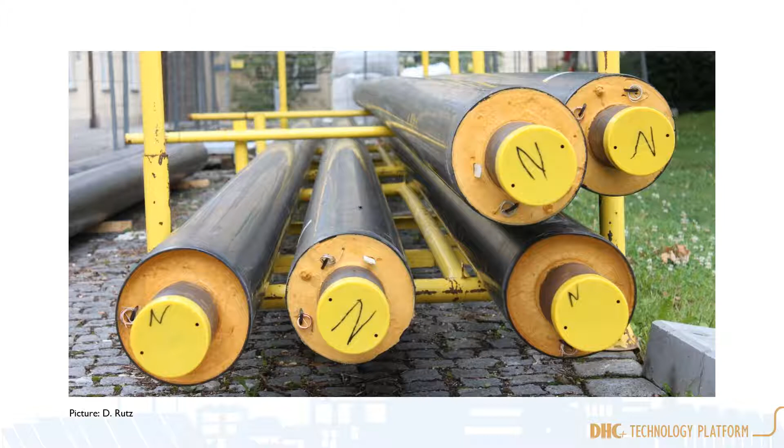Today, I'm happy to talk about this topic with our speakers. The first one is Matteo Pozzi. Matteo is participating in the UpgradeDH project. He is CEO and partner of Optit since 2010. After a degree in physics and more than 15 years in management consulting, Matteo is a big fan of digitalization and advanced analytics application to business processes. He's trying to build a better and more sustainable world.

The second speaker will be Evaldas from the Lithuanian District Heating Association. Evaldas is also actively participating in the UpgradeDH project, and he is an energy technology and economics analyst at the Lithuanian District Heating Association. Then we will hear from Sebastian Grimm. Sebastian has a master's in mechanical engineering. He is working for AGFW, the German District Heating and Energy Efficiency Association, more specifically for its research and development department since 2016. His research topics include digitalization, district heating pipes and systems.

I also have the pleasure of knowing Sebastian since 2016, when he participated in the 4th DHC Plus summer school in Warsaw. And finally, we will hear from an external expert, Peter from LOGSTOR. Peter is a product and academy manager at LOGSTOR. He's educated as an engineer at Aalborg University in Denmark. What's interesting is that he started working for LOGSTOR in 1992, which means he is a very loyal employee of LOGSTOR.

Aksana asked me to introduce the UpgradeDH project for everyone's benefit. It's a project that concentrates on upgrading the performance of district heating networks in Europe, spanning systems in Eastern European, Central European, and Mediterranean and Balkanic countries, and across the whole value chain: production, distribution, and consumption. It puts together interesting but also actionable best practices, tools, and options for upgrading existing district heating systems. There's also a well-done handbook, and right now a district heating image-raising campaign has been launched, which I'm sure Aksana will tell us about at the end.

The project is now at the beginning of its third year. We've got a good range of interesting options that have already been tested, and we are happy to see that the pretty ambitious objectives for improving primary energy demand and greenhouse gas reduction are likely to be met. We are now defining potential regional and national action plans, looking at replicability. This public webinar is one of many opportunities to bring you the know-how developed by this interesting consortium. The slide also has the website, which is a good source of interesting material.

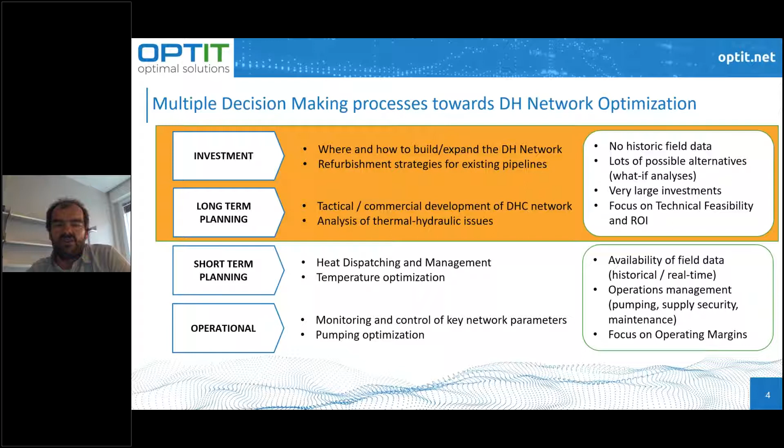Then there's also a big area of decision making in short-term planning, like how to dispatch heat, how to optimize temperature, down to operational decisions involving monitoring and control of network parameters and pumping optimizations. Today we are focusing on the upper part of the chain, even though during the UpgradeDH project we also had good examples of actions on optimizing short-term and operational planning.

The fact that pipes have to respect the thermal-hydraulic settings, the physics of it, but that also needs to be mixed with economics valuation. And the final result is something that needs to justify investments, which normally goes into return on invested capital indicators like net present value.

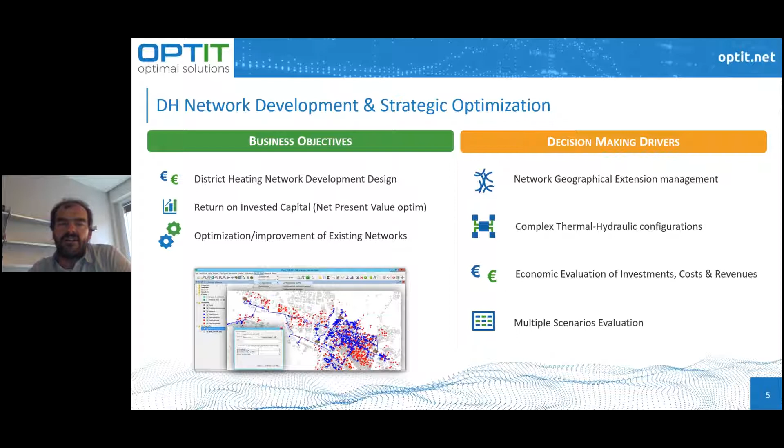So in order to do this, a tool has been developed that started on a GIS tool, allowing to manage all existing and potential pipings and users, of course a mix of different plants, both existing and potential.

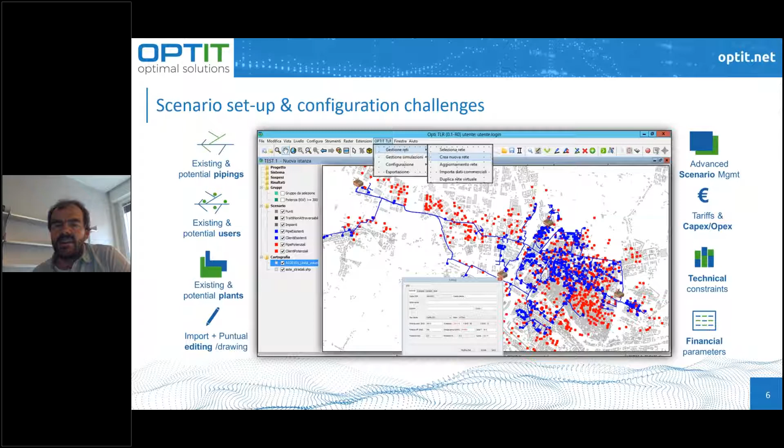Every element in the map needs to be editable and manageable by the user, and this needs to be characterized both from a technical viewpoint, but also from an economic standpoint with financial parameters in order to manage a diversity of scenarios.

So these are examples of studies on the thermal hydraulic simulations. This is actually coming out from UpgradeDH, because investment decisions require the capacity to set up a scenario, but then also compare them with a lot of efficacy.

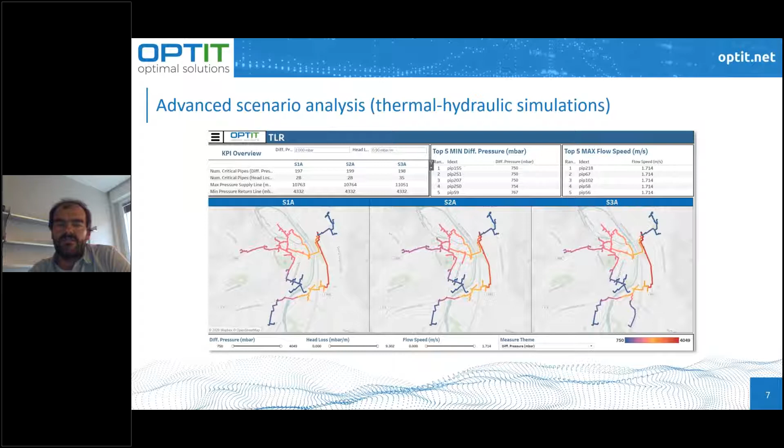Maybe the most interesting point regarding a tool like this is that it doesn't only allow us to simulate how this heating pipe piping system works, but also allows us to choose the best possible potential expansion strategy.

And it is the system itself that, out of the many potential combinations, will choose the one that maximizes the net present value. Just imagine that if we have 100 potential users at hand, the number of possible combinations is 2 to the n, which is a number with 30 zeros behind. So a huge number of potential options, but the one that optimizes the net present value is one.

And our system is designed to guide the user towards that optimal solution. Of course, that means choosing the right pipes to be built, the right customers to be connected among the possible ones, and also deciding on the minimum diameter of the pipings.

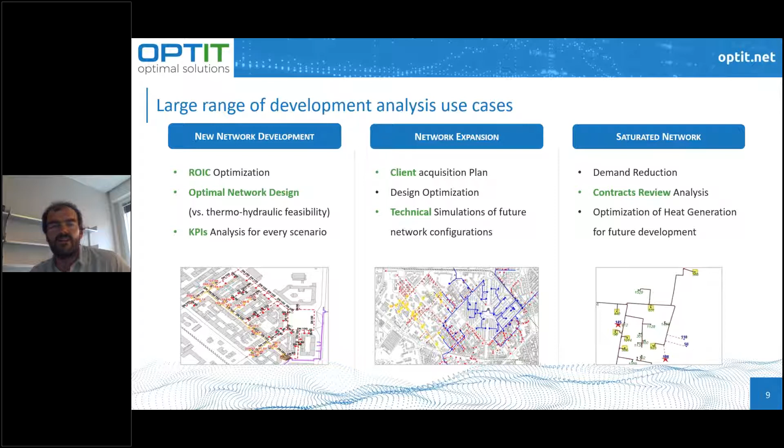So lots of different options throughout the value chain of a network, but also lots of simulation capabilities that span both on the technical side and on the economic side.

The model itself actually looks at the full cash flow and the financial investment strategy for each scenario. So lots of very interesting comparisons can be made.

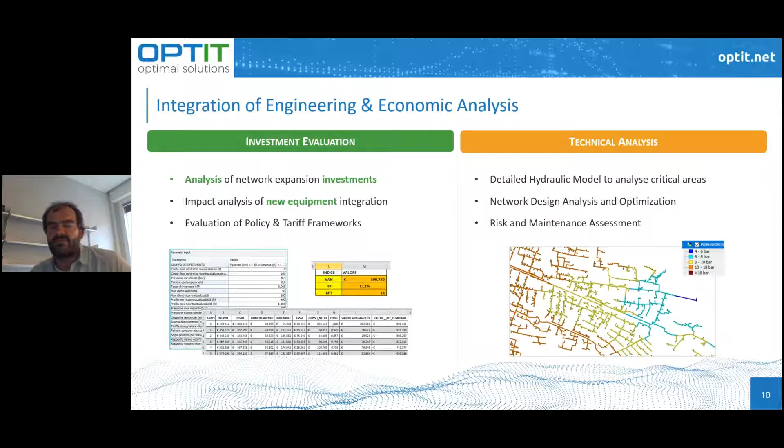I will finish off, because time is very strict, with a few examples of the application of such systems.

One is actually with A2A Calore e Servizi in Milan. It's a good example of something that starts in the digital world, but then is brought down to earth.

The case of A2A was to understand how best to allocate heat, capture customers throughout the backbone of more than 6 kilometers, an interconnection between two existing systems, very densely populated, with a huge number of potential choices, and they were supported.

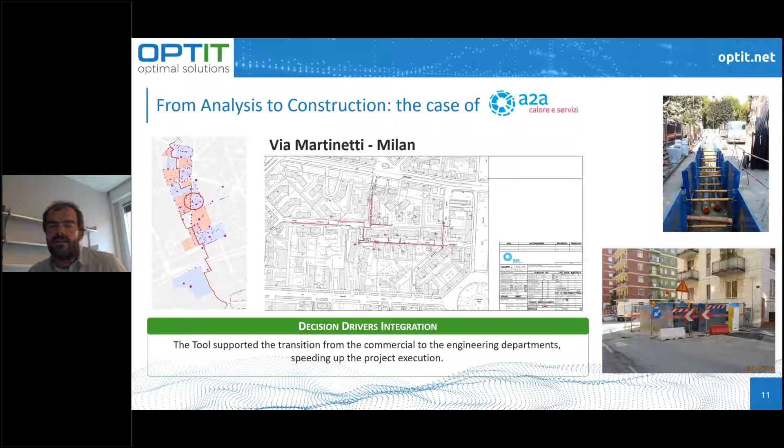Actually, they're using this system as a service to improve and allocate their commercial efforts in the best possible way. Maybe a very interesting outcome of the experience with them is how the tool was used not only by the engineers, but also by the people in the marketing and commercial department, those who knew the market, embedding commercial and technical decision making in a single tool.

We're speaking about UpgradeDH, so it's fair to say that we exploited a tool like this, and we used it in two places. One is Marburg in Germany, and the other one is in Lithuania, in Šalčininkai.

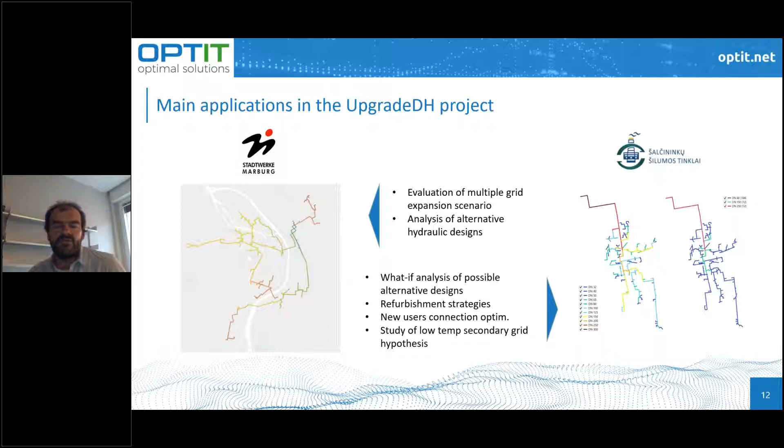In both cases, we looked at different design options and expansion capabilities. In the case of Šalčininkai, it was also good to apply the same tool to analyze refurbishment strategies and the study of a low temperature secondary grid hypothesis, a very versatile tool. I will finish, since my time is almost over, with maybe a more prestigious project for the UN environment, the District Energy Initiative.

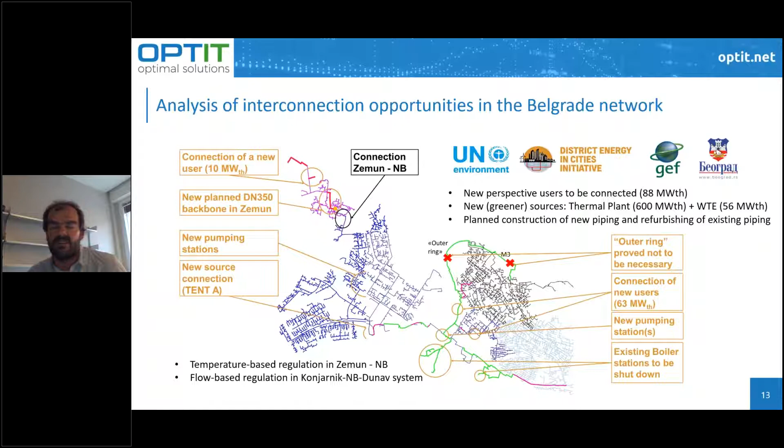A tool like this, connecting physical and economics, was used to study the opportunities of interconnections in the Belgrade system, one of the largest in Europe and the world. Looking at a variety of challenges - switching off fossil fuel plants, new customers, new pumping stations, big new connections to renewable sources - I think it was really put to the test, but it still provided the basis for very interesting decisions that lead the process towards better and greener systems in the upgrade, exactly in the spirit of the UpgradeDH project. I'll stop here.

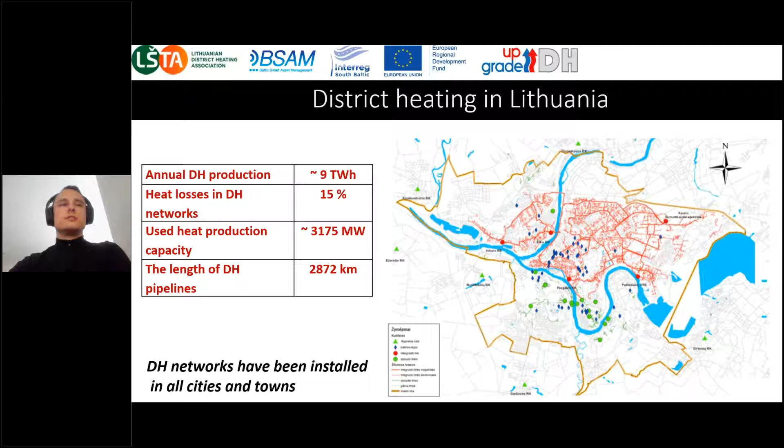First of all, the district heating sector in Lithuania has an annual production of 9 terawatt hours. The heat losses in the networks are 15%. The used heat production capacity is 3.2 gigawatts, and the heat is supplied via almost 3,000 kilometers length of pipelines. District heating networks, basically without any exceptions, are installed in all cities and towns. The share of district heating is constant over the past decade and stays around 57%, which is third in Europe.

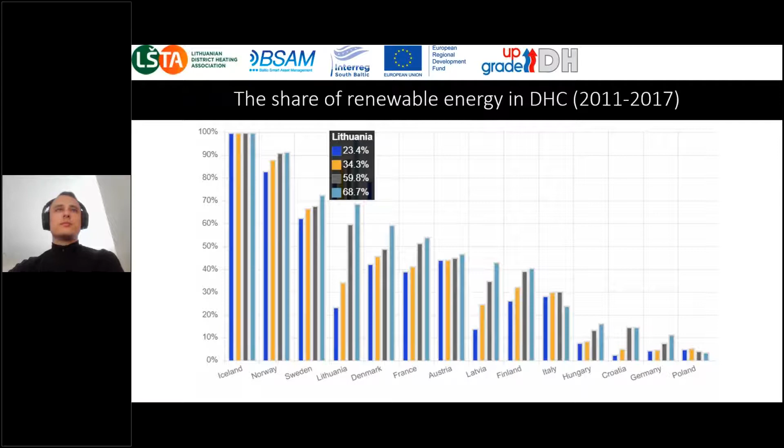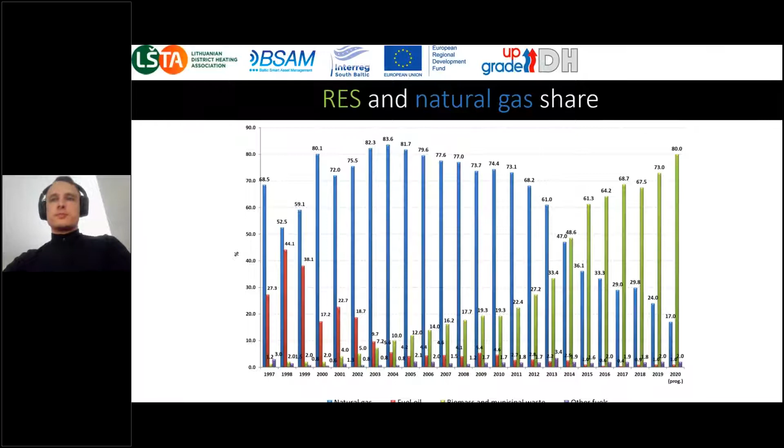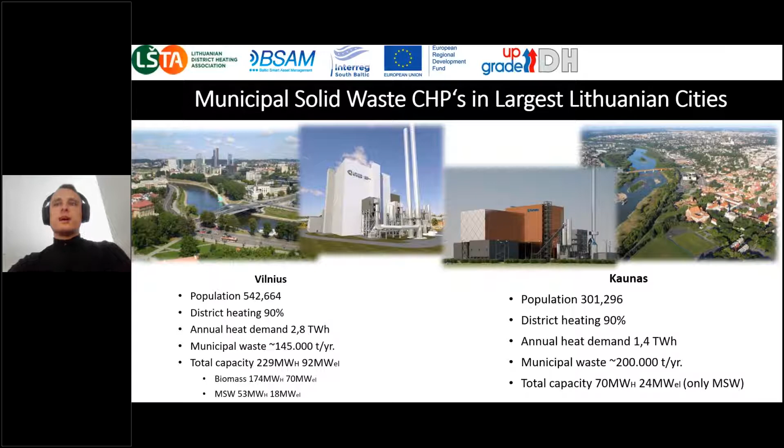Our sector also in the past decade had a significant jump in renewable energy source usage, from 23% in 2011 to more than 70% today. The vast majority of this fast transformation to renewable energy sources consisted of elimination of natural gas with biomass in heat production. This year we are expected to overcome the 80% renewable energy source usage limit, since 2 large-scale CHP plants will start working in our largest cities.

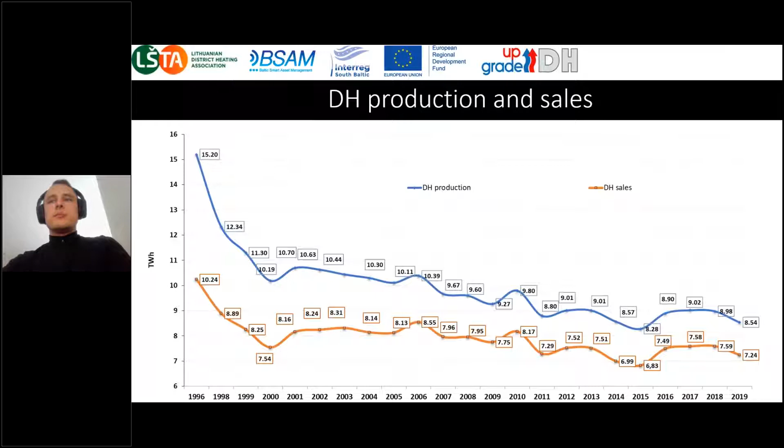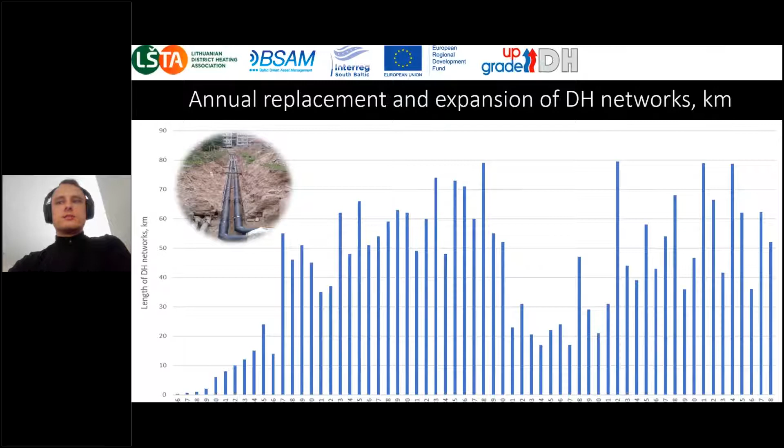As district heating production and sales in our country are on a constant decrease because of ongoing renovations of buildings and warm winters, the majority of district heating pipelines are becoming more and more oversized. This graph shows an annual replacement and expansion of district heating networks in Lithuania. The statistics were gathered using perennial data of the whole district heating sector. This graph together indicates the tendencies and approximate lifetime of the pipelines, which based on this analysis show that it's between 30 to 40 years.

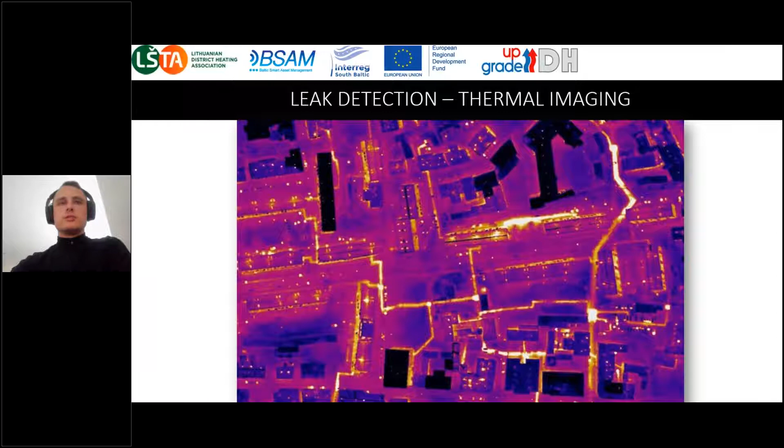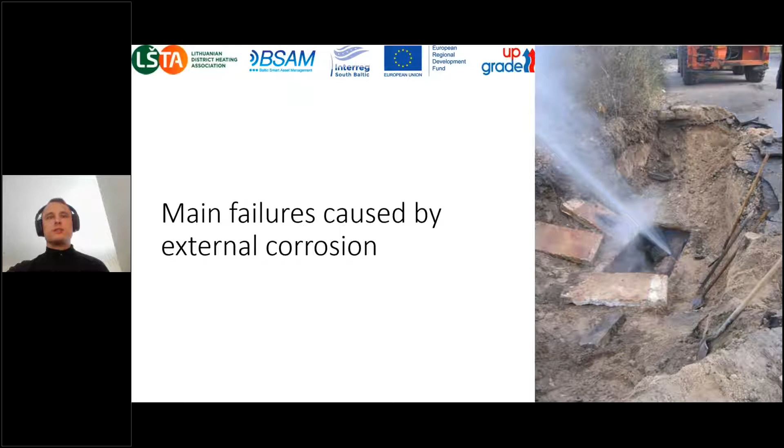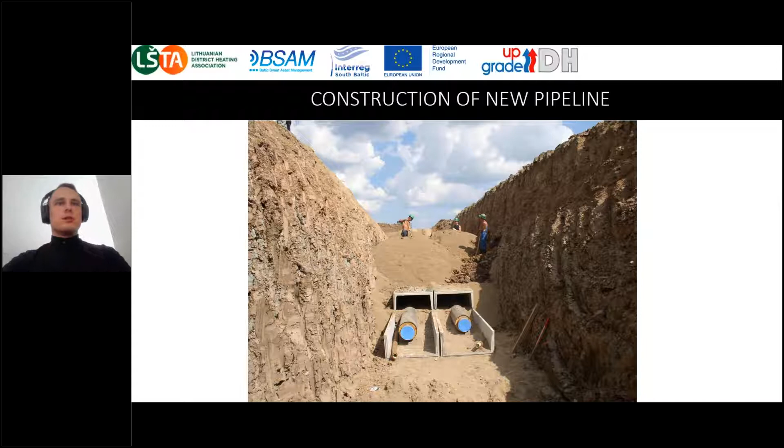For leak detection, our companies often employ thermal imaging and other technologies depending on the situation. Corrosion speed identification technologies are also used by some companies. Sadly, not all companies are interested in monitoring such parameters, especially the smaller ones. Today, the main failures in the old part of the networks are caused by external corrosion. This picture shows typical construction of new pre-insulated pipelines which were inserted into an old concrete channel, so you can get the idea what kind of work companies are doing while changing the pipes today.

The Lithuanian District Heating Association is also participating in the Baltic Smart Asset Management project, and as the name indicates, the purpose of the project is to develop methods and collaborate between countries on smart asset management topics. As we all probably know, the main drawback of district heating is the capital need and inefficient operation, thinking about heat losses, which expressed in economic terms would result in a low return on capital, and it also requires a massive replacement need.

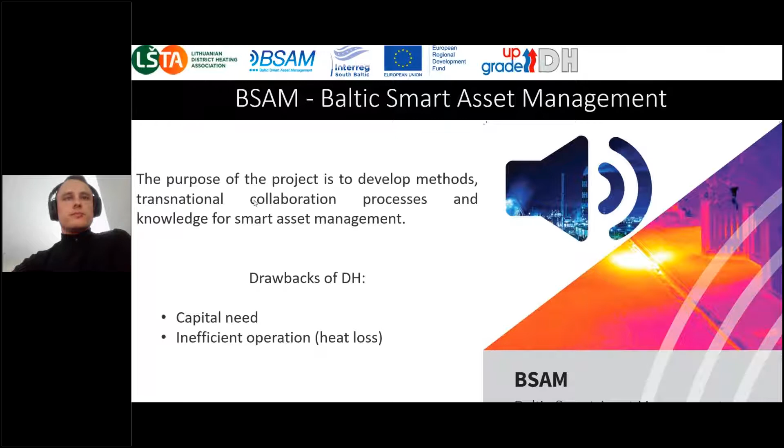So in order to solve these challenges and boost district heating efficiency and reduce the capital need, asset management is one of the most needed processes. It creates environmental benefits and more affordable heat to end consumers by utilizing the current infrastructure for a longer period. The Baltic Smart Asset Management Project activities focus on digitalization solutions of distribution networks, the development of condition monitoring, utilizing the latest ICT tools for data-driven predictive maintenance.

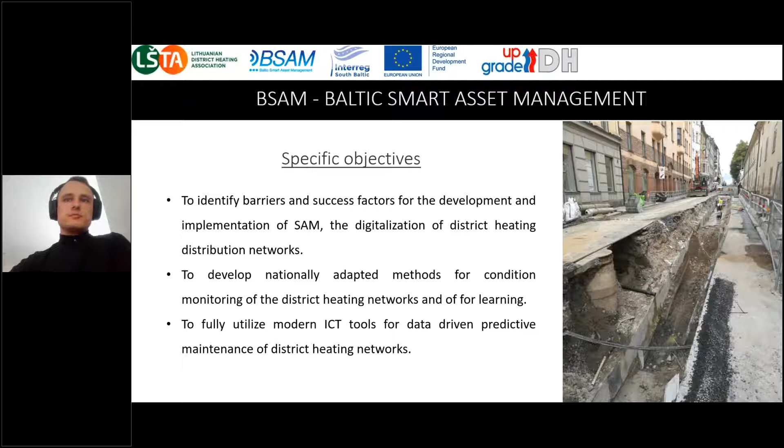The current trends from talking with company CEOs are that most of the ducts transmit only half of the energy volume they could. Operational efficiency is better, or soon will be better in most cases, than selling more heat. And the distribution grid could live way longer than 30-40 years if modern maintenance techniques were employed.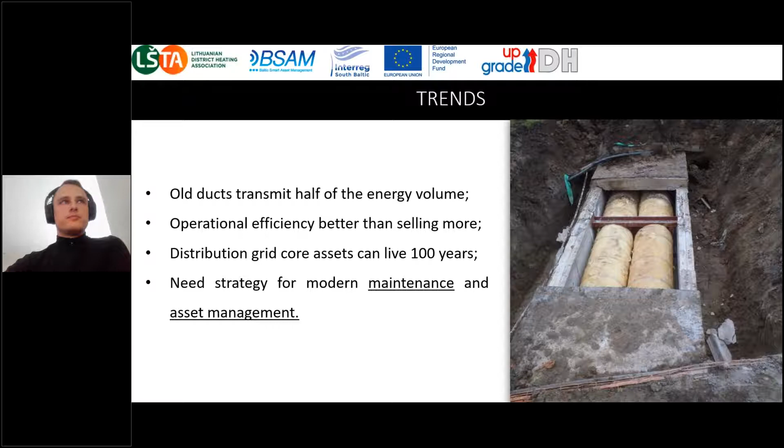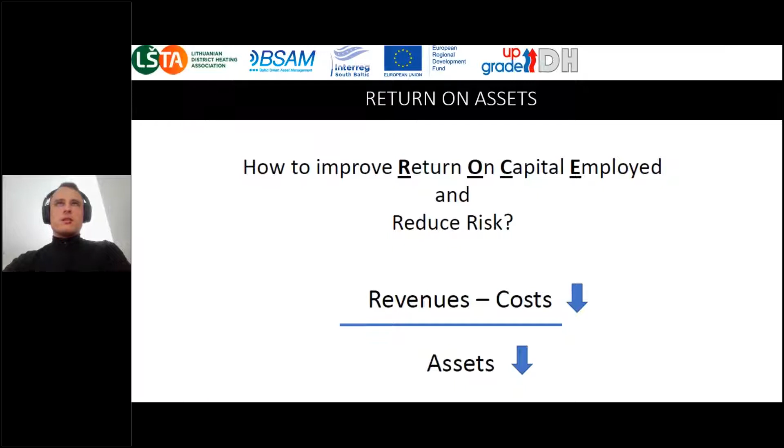So in order to improve the return on capital employed, we need to reduce risks and operational and capital costs. It's obviously hard to balance between expensive old pipe replacement, which gives negative effects on third parties, and aging pipes with higher leakages, higher heat losses, and higher repair costs.

There are different asset management techniques, and the simplest ones are being done constantly by most companies. Other techniques require digitalization and installation of various sensors, and maybe even usage of artificial intelligence solutions.

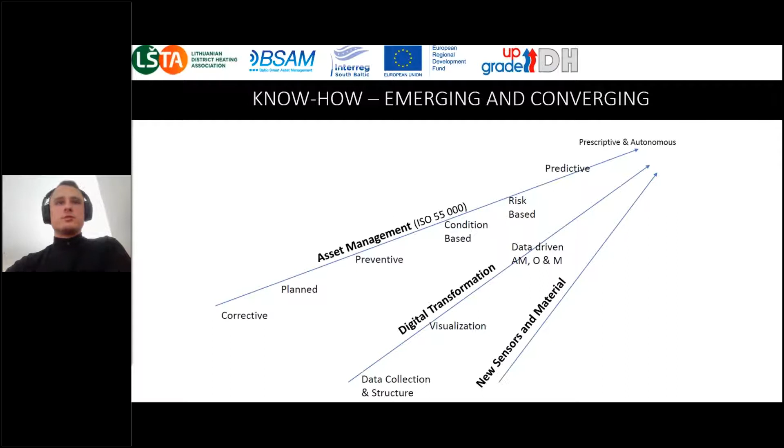Basically, maintenance methods of the network could be split into four categories. The first one, the corrective maintenance method, is more or less done by all district heating networks after any failure occurs. In Lithuania, for example, and probably in many other countries, planned testing is performed for the network, which provokes failures in the weakest parts during the warmer period of the year, usually summertime.

Some companies might choose to change pipes and prevent failures. However, the preventive method highly increases the capital costs.

And today, what modern district heating networks are looking for is to use various sensors and technologies which could accurately identify the condition of the network, so the company would be well prepared in this matter, significantly reducing operational and capital costs.

With the help of digitalization and possibly artificial intelligence, data-driven predictive maintenance would be employed in more and more networks, becoming a next stage in asset management.

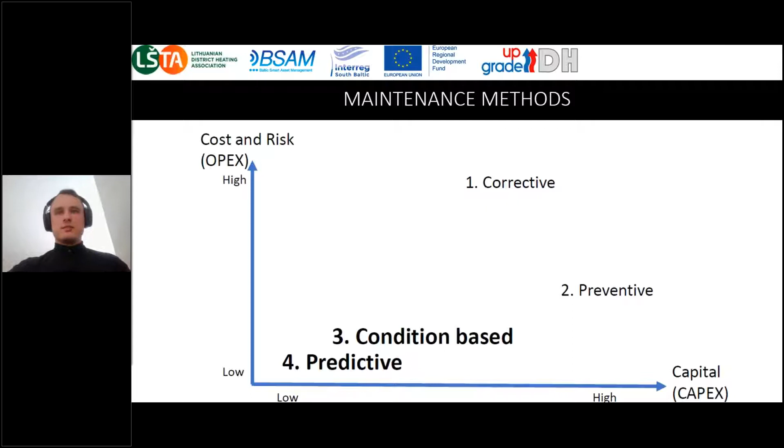So if we could accurately predict the condition of the pipework, we could optimize and selectively refurbish the network. This would ensure expansion of utilization, and the whole process would minimize losses, fuel costs, operation costs, failure risks, and, most importantly, capital need.

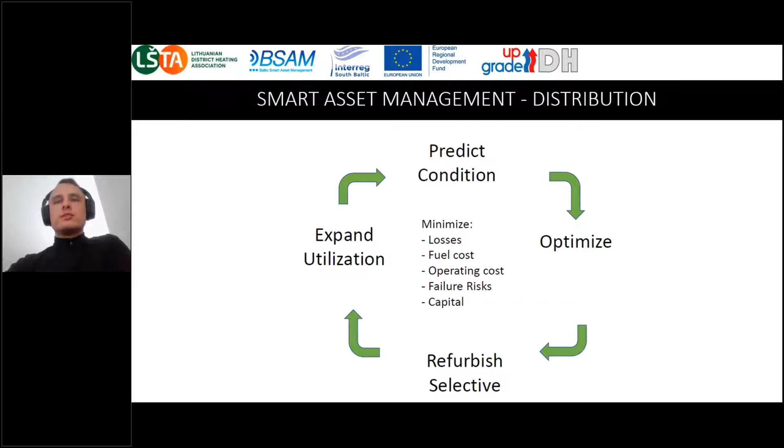In other words, predictive maintenance would help detect and locate corrosion or thermal wear of the pipes well before they burst, therefore highly increasing the utilization of the network and eliminating risks.

This is the area in which our leading companies would like to improve, and they are always looking at various new technological solutions that appear in the market.

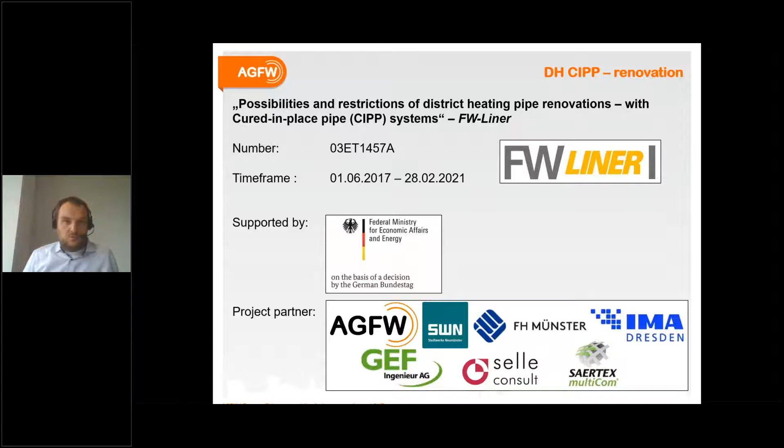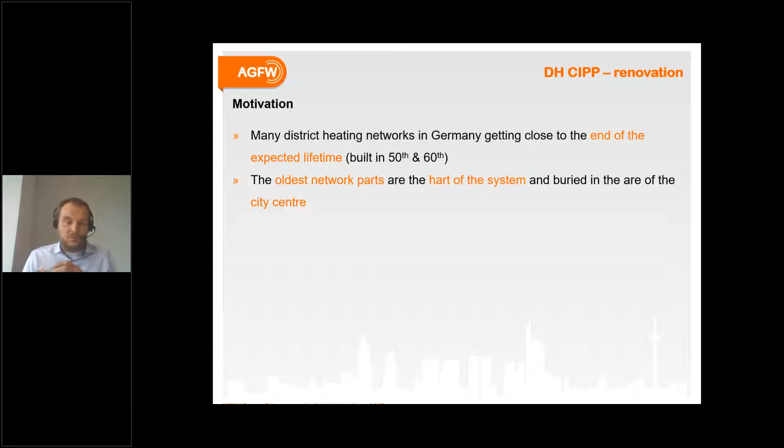In Germany, and I think it's pretty similar in many other European countries, the district heating networks, especially the pipes, were built around the 1950s and 60s, and they are coming close to the end of their expected technical lifetime. One of the biggest problems is that these historically grown district heating networks grew with the cities, so the centers of the networks are also in the center of the city, and these places are usually not very easy to dig up.

This is the reason why we're doing this kind of project, to get an idea if we could find a new technology as an opportunity instead of replacing a piping system, which is usually very expensive, especially if it's an unplanned pipe exchange. I'm not aware of many different opportunities for short-term fixing options, and that's the reason why we're going for this research project.

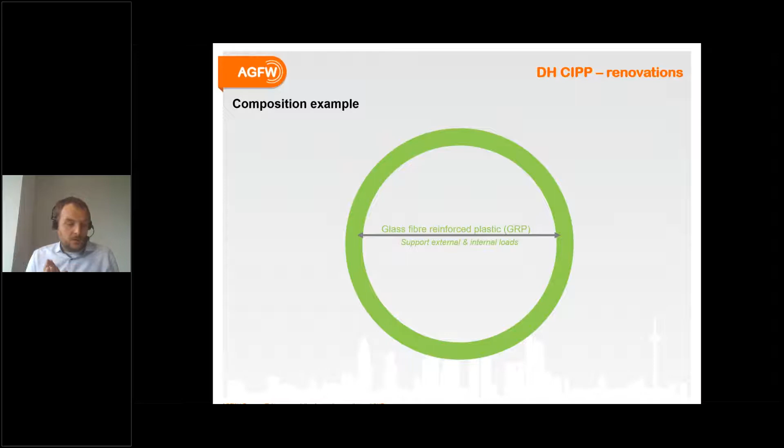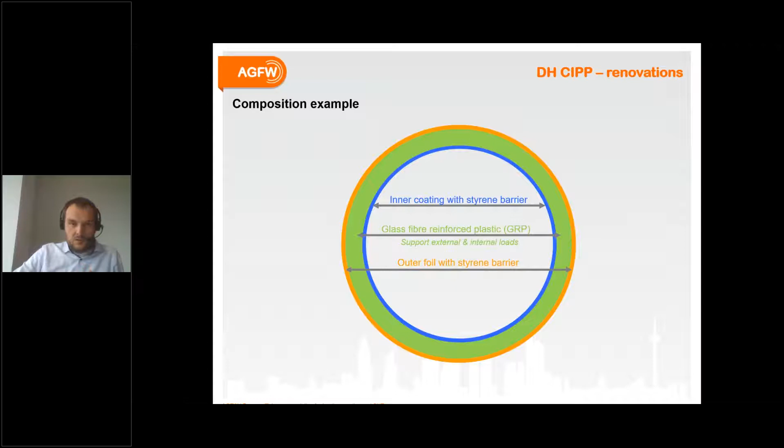To give you a short idea how the system looks like in general: this technology comes from sewage water applications, so it's well known, but it's quite challenging to adapt to all the requirements of district heating. The basic idea is to use a flexible tube made of glass fiber with a viscous resin added, with an inner and outer coating or foil to keep the resin contained, and usually a protection foil on the outside.

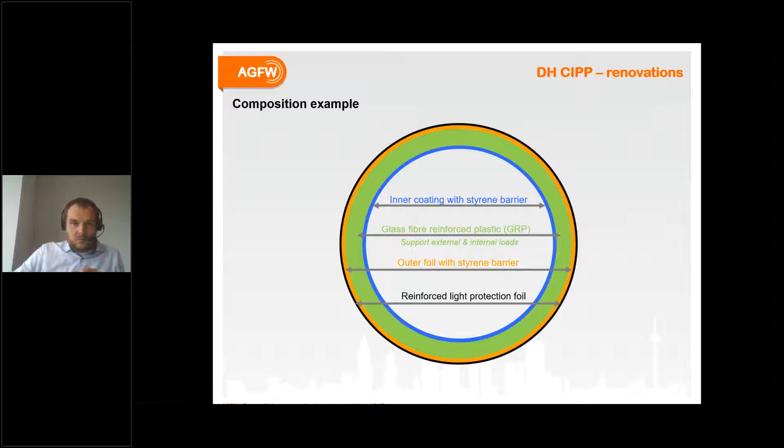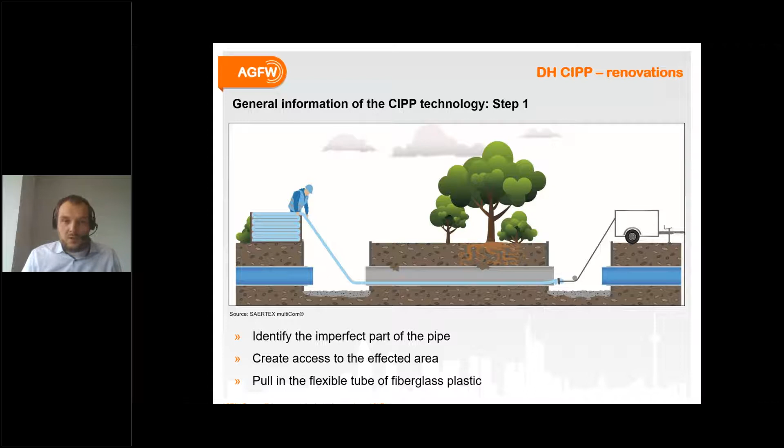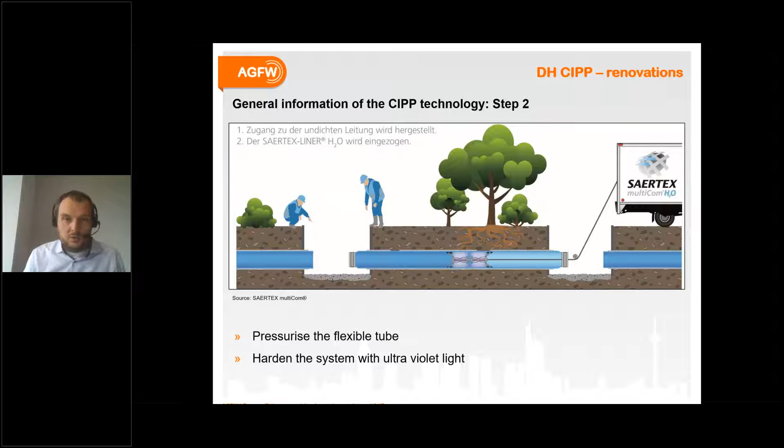Here's an explanation of how the technology works. In the picture, in the middle there's a simplified pipe that's somehow broken. In this case, you're not able to dig a hole right under it. So the idea is to dig before and after the broken area, pull this flexible tube into the existing pipe, then pressurize it and use ultraviolet light to harden the system. After this hardening process, you end up with a very straight new pipe inside your existing district heating pipe.

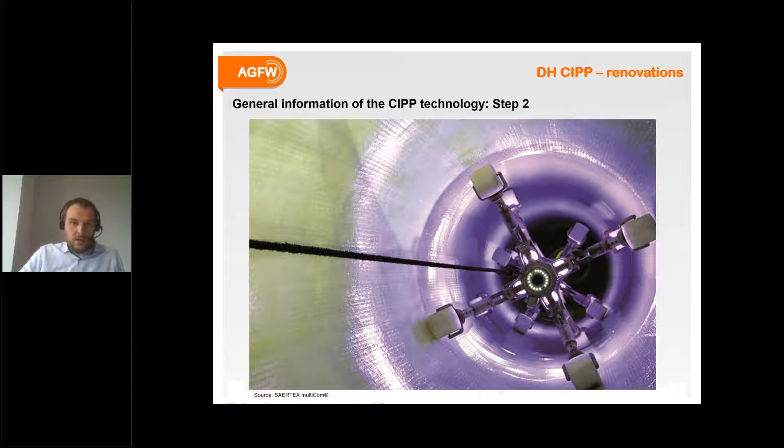So it's not replacing the old pipe, it's more of an additional tube fixing issues with a new layer inside. For finalization, you have to close or connect the old pipe to the tube system using special parts, which is also challenging in district heating. Then you reconnect the grid, perform a leak test, and put the pipe back into service without fully replacing it or digging up the whole area—just two smaller holes at the beginning and end of the renovation area.

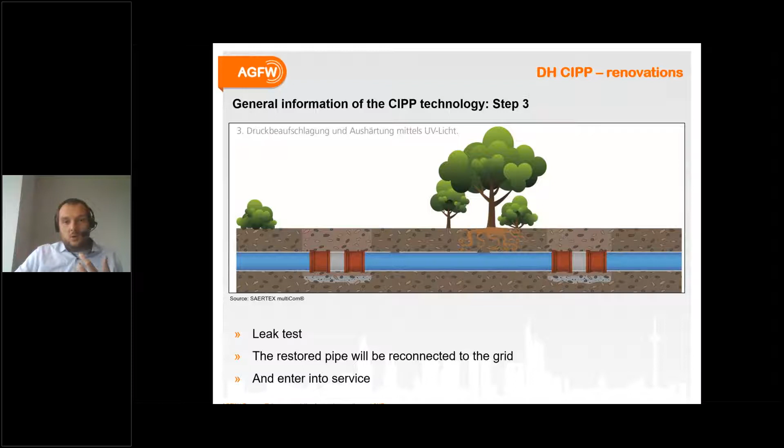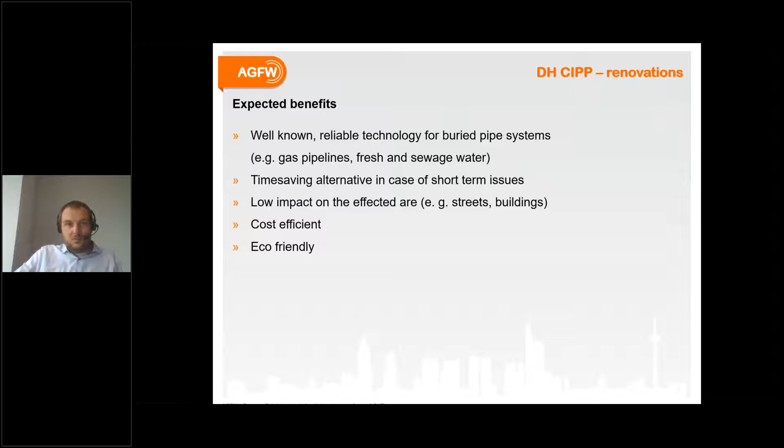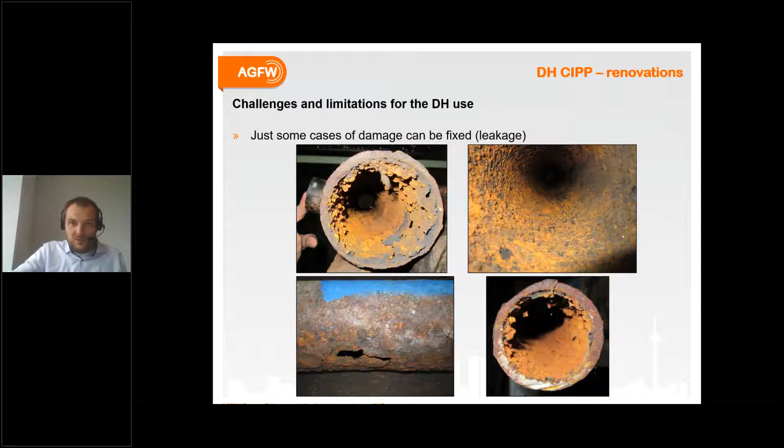There are also special challenges for pre-insulated piping systems. Of course, the temperature level is very challenging and different from sewage water applications. So this is a development we made during the project, to identify which resins could handle the high temperature levels in these systems. Also especially challenging is the typical district heating pipe characteristic—a classical district heating system can have a variation of diameters, with small connections to big pipes all over the network, which is quite challenging for the cured-in-place pipe system.

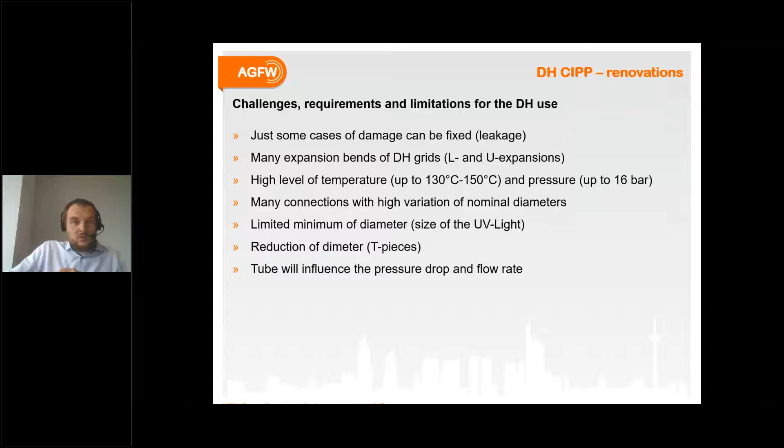Depending on the idea where you want to use this system, it has a big influence on the effort of development needed until you can use it on a commercial basis. It's very important to know if this cured-in-place pipe system is a short-term or long-term solution, and it could be helpful if you have limitations in the maximum temperature level. But it also depends on the diameter of your pipes. Depending on the market share of the piping diameter, it's more or less challenging to develop this technology to the end.

When we finish the project, we are going to have a first demonstration case with a testing scenario, using a real district heating pipe and insulating it with this kind of inline layer. We will find out at the end of the project if it's worth it, or suitable, to use this kind of technology for district heating.

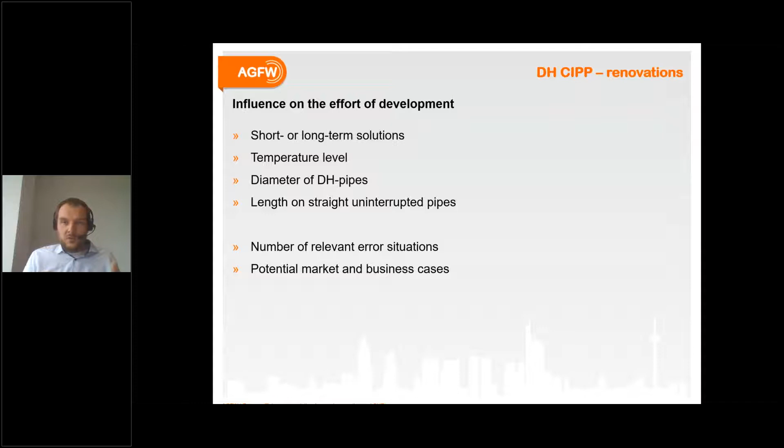But on the other hand, it's a step afterwards to identify the technical limitations we identified during the project, and if there's a market share high enough to go for further development to bring this kind of technology to a real business case level.

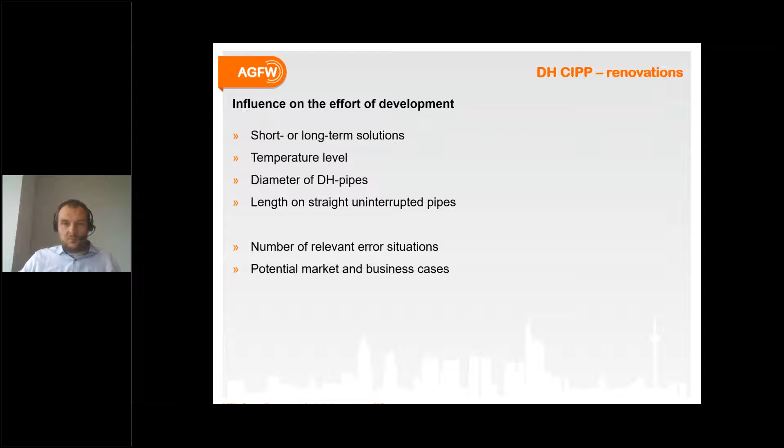This is the short introduction to this kind of project. If you have any additional questions afterwards, you're very welcome to send me a mail or give me a call. Thank you very much for your kind attention.

Yes. So do you see my screen? Yes, you just need to put it in show mode and hide the GoToWebinar control panel with the orange arrow. So yes, perfect, now it should be there.

Okay, yes, thank you. So I will just jump directly into the presentation. First, I will elaborate a little on the word modern.

For me, modern is that we work in the direction of what is inside the 4th generation district heating, becoming 5th generation as well. It's focusing on low heat loss from the pipe system as possible. It's also focusing on making sure that you keep the same properties during the whole lifetime of the system, especially when it comes to the heat loss properties.

It's about having information on a running basis about the condition of the pipe system, especially if water comes into the insulation, and you need to be able to make repairs immediately. Then it's also about making a modern choice of pipe system.

When I say modern, I mean a choice based on total cost of ownership, where you evaluate what is the best choice seen over the lifetime of the system. And then, of course, making sure that already in the planning phase you think about how to secure your assets, because when the pipes are in the ground, you have to live with the consequences of your choice during the lifetime.

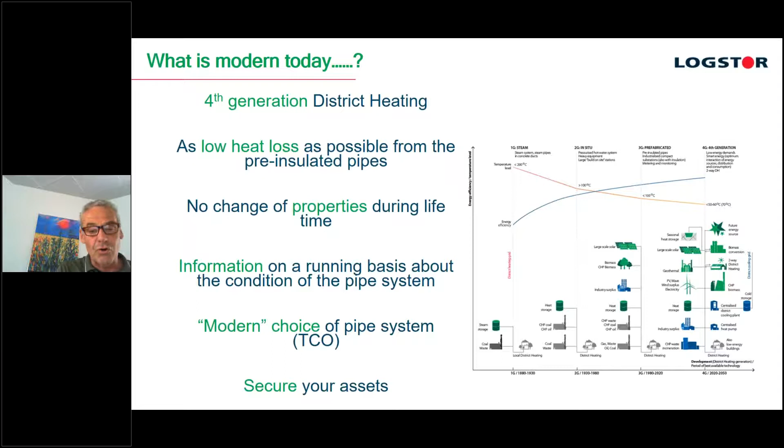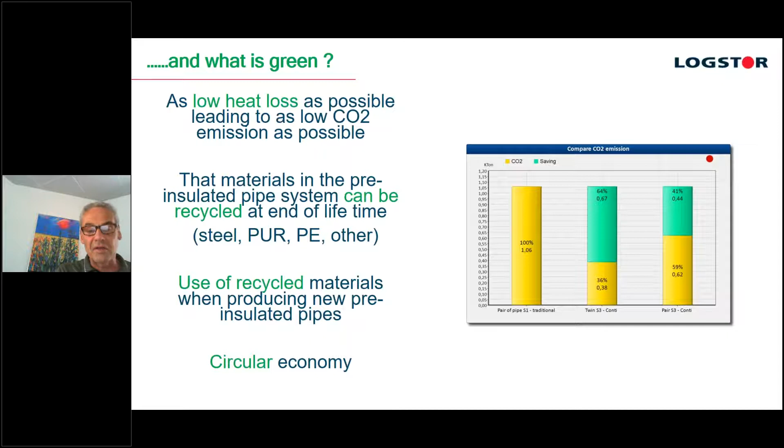So what is the right choice of pipe system if we look at it from a total cost of ownership perspective?

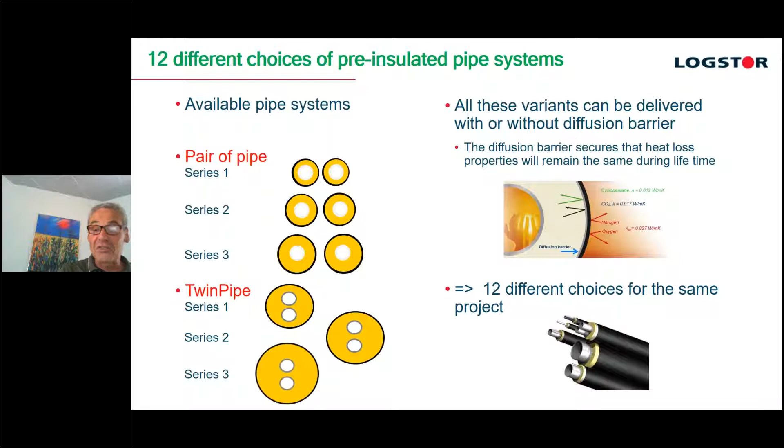To make the right choice of pipe system, you have to evaluate between all the different choices you have. If we look at a relatively low dimension of pipes that everybody has in the system, you can do single pipe or twin pipe, each in 3 different insulation series. And you have pipe systems with a diffusion barrier that secures the insulation properties of the polyurethane foam remain the same during the lifetime. All in all, that leads to 12 different choices for the same project, so it's a complex situation to make the right choice of pipe system.

If we look at how it actually looks today in Europe for single pipes, we can see that 60% of the market installed today is actually S1, so 60% is the worst insulated pipe system available.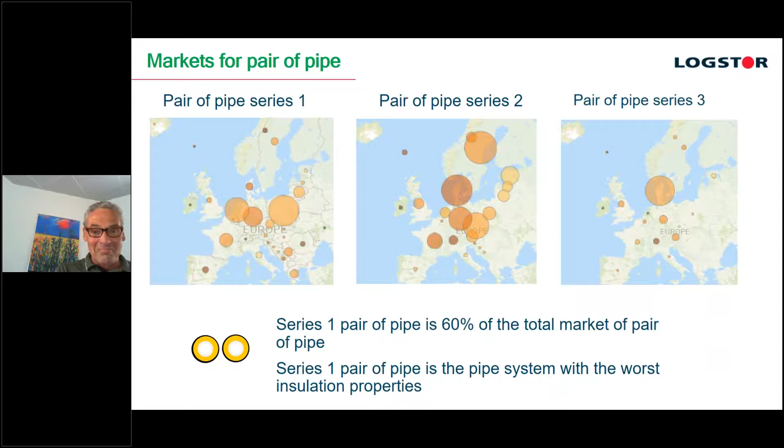Twin pipe is the pipe system with the lowest possible heat loss. Twin pipes represent 35% of the market of installed pipes today in the dimensions where it's possible to make a twin pipe. In Denmark, that figure is 70%. In Poland, it's around 5%, and in Italy, close to 0%. Lowest possible heat loss, and thereby also CO2 emission, comes from a twin pipe system.

What we see today is that a lot of energy companies do what they do because that's what they've always done. And I think that has to be challenged in the future.

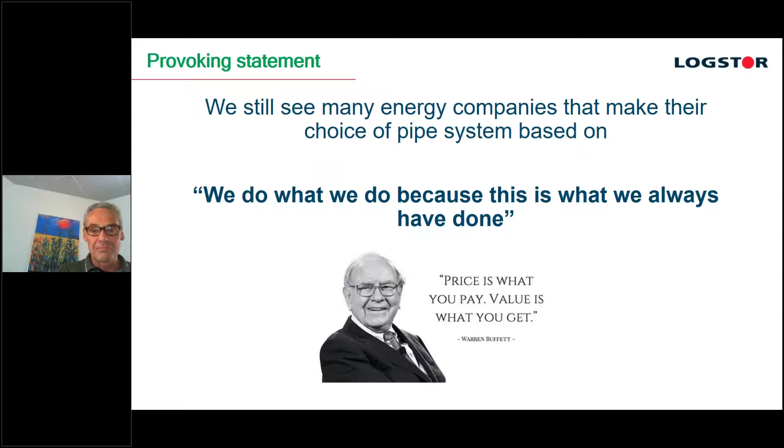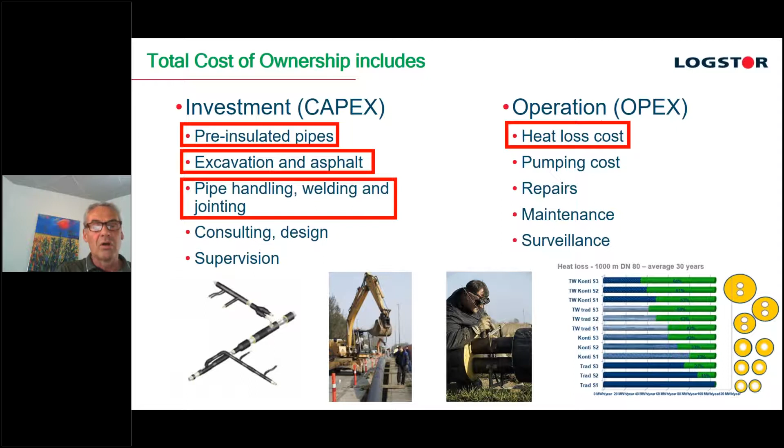We have made a model where we can calculate on a project and evaluate all 12 different possible choices you can make, looking at the total cost of ownership. On the investment part, the CapEx, we have included the investment in pipe materials and in contractor work. On the operation part, the OpEx, we have included the heat loss cost. We haven't included pumping cost, for example, but that cost would be the same across the 12 scenarios. So that's what we've included in our model for calculating total cost of ownership.

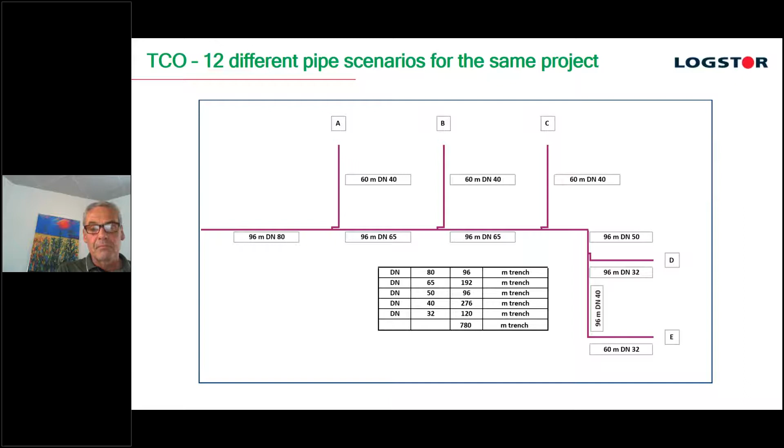So this is basically the predefined project we are evaluating - dimensions that everybody will have in their network. Then we have calculated the total cost of ownership for all 12 different scenarios.

Importantly, the energy company provides the assumptions for the calculation - the material cost and the contractor cost, and the assumptions used for calculating operational cost, the heat loss. Especially the period of years we are calculating on, but also the price of energy.

We recommend that when you make a total cost of ownership calculation, you should calculate on at least 30 years. But we actually see a trend that energy companies calculate over much longer time, some even 70 years, when evaluating which system is best to choose.

They should do this for all the possible scenarios, and then make a sensitivity analysis - analyze different time periods, different energy prices, and see what is the right choice. Because once you make the choice and put the pipes in the ground, you cannot change it. You have to live with the consequences for the rest of the system's lifetime.

So in this case, with these assumptions, the optimal district heating pipe would actually be the best insulated district heating pipe. But it all depends on the assumptions - it could also be something different.

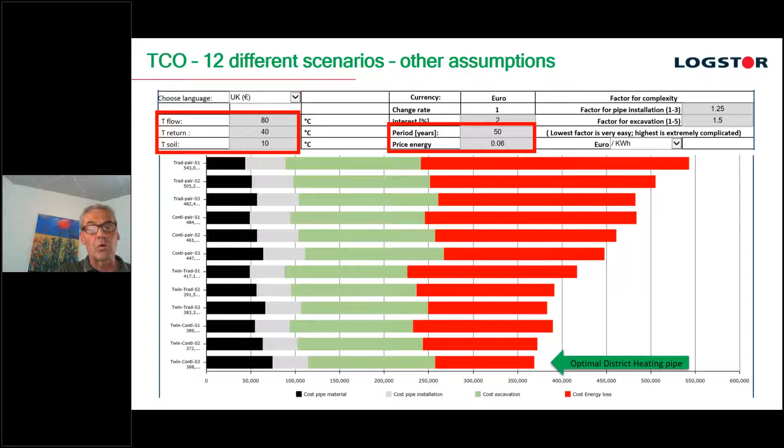To compare the CO2 emission, I've chosen to compare three of the pipe systems. The worst insulated is at the left of the picture - single pipe series 1. Compared to that, the best insulated pipe system, which also has the lowest CO2 emission, has a CO2 emission that is 64% lower, and the heat loss is 64% lower as well.

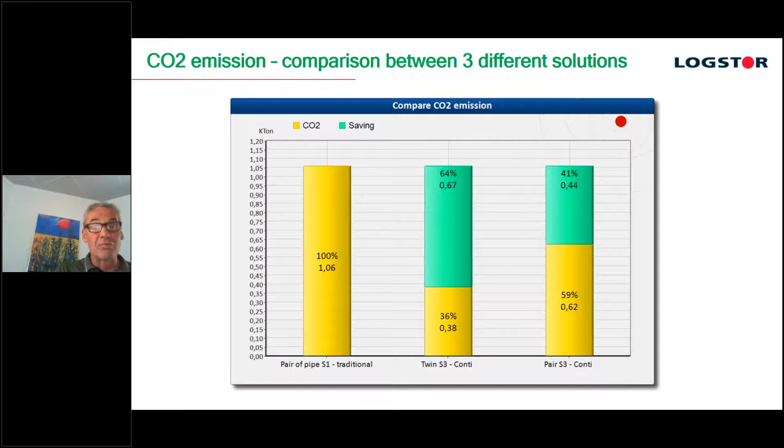And then you of course have to think about the assets, and you have to do that already in the planning phase and the installation phase. Not only when the system is in operation - you have to start thinking about how to maintain your assets already when you plan the project.

It's important to choose the right materials. It's also important to educate those installing the project, installing the joints, so they are trained to do the job they're supposed to do. And then the energy company has to supervise the job. We often see that this is actually not done.

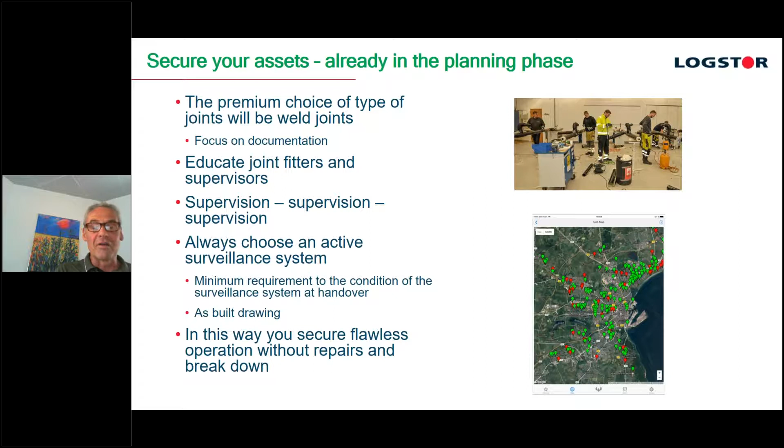You should always choose an active surveillance system where you get immediate information if something is happening, like moisture in the system, so you can react. By following these very simple guidelines, you will have a system with flawless operation and no breakdowns.

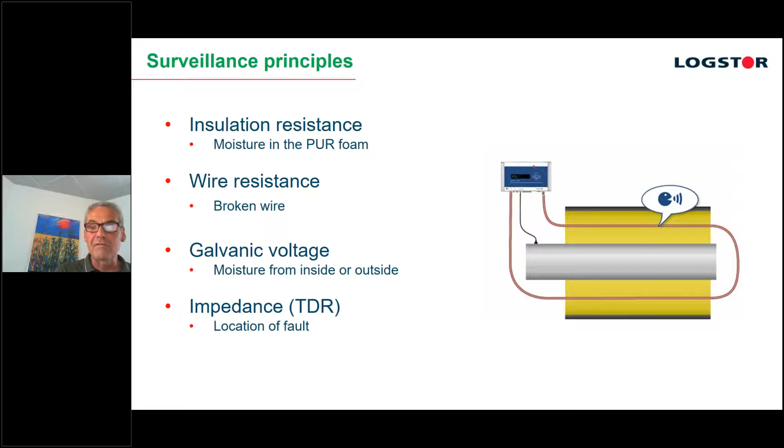So what kind of information from the network can we have as it is today? We can have information from the surveillance system. From that, you can have information about if water is coming into the insulation, or even if water is coming from the outside of the pipe or from inside the pipe from the media.

We can have information about wells, about flooding in the wells. You can even have some information about temperature and pressure with the right equipment.

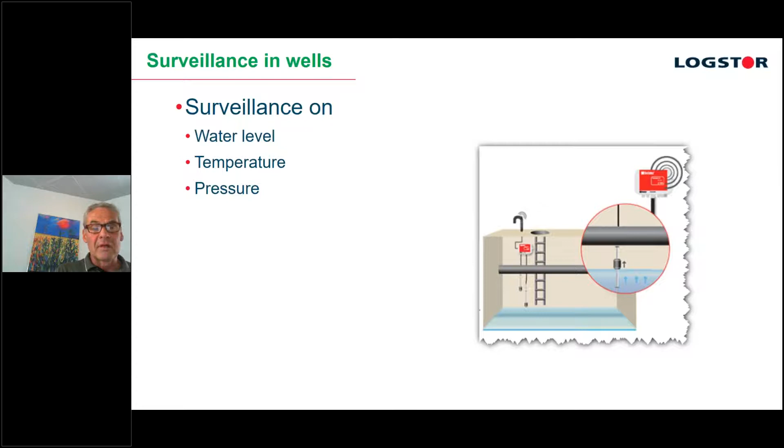And then as management of an energy company, you need information, a kind of dashboard from where you will have the total overview about your system, to see where you have places where you need to do corrective actions in time, so that you avoid expensive repairs.

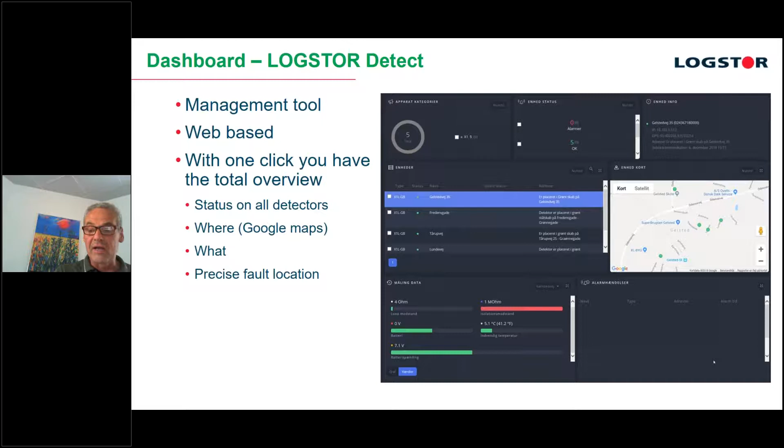How does the future look? What is modern in the future? I think total cost of ownership must also be modern in the future - it will always be modern. And it goes for any type of pipe, any type of media pipe. So I actually do not think about what the type of media pipe is, if it's steel or plastic. No matter what, you need to make the total cost of ownership on different pipe systems as well, and you need to do it on different insulation series and so on.

Again, in the future, be green and think circular will for sure also be modern. Then we will probably see much more digitalization of the pre-insulated network, so we need to get information from the network so that the energy company can optimize the operation in respect of temperatures and pressures over time, and in that way also reduce the heat loss of the system. And all of it has to bring value to the energy company.

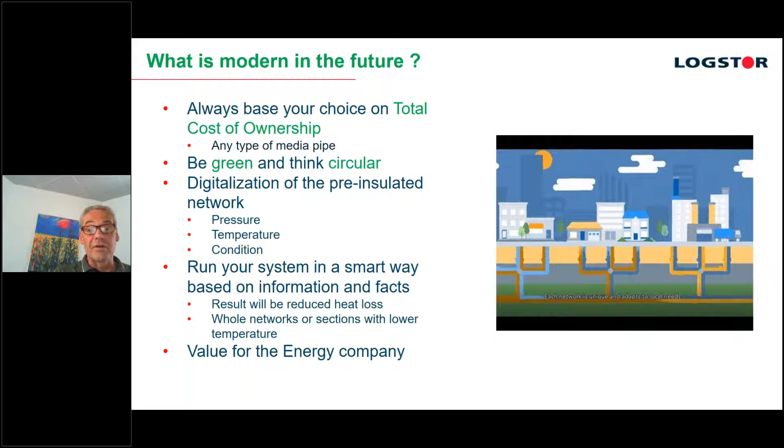What will be the vision for the future about green solutions? Again, total cost of ownership will also be green in the future, because looking at investments over a long time, that will give the choice of whether you have the lowest possible heat loss, and that will benefit in the way that you have the lowest possible CO2 emission.

Then, of course, use of recycled materials - we will see more of that in the future. And we have actually started that journey already. We participate in different funded projects about using recycled polyurethane foam and recycled plastic from industrial waste. So you can say the long-term vision is that new pre-insulated pipes are produced from 100% recycled materials.

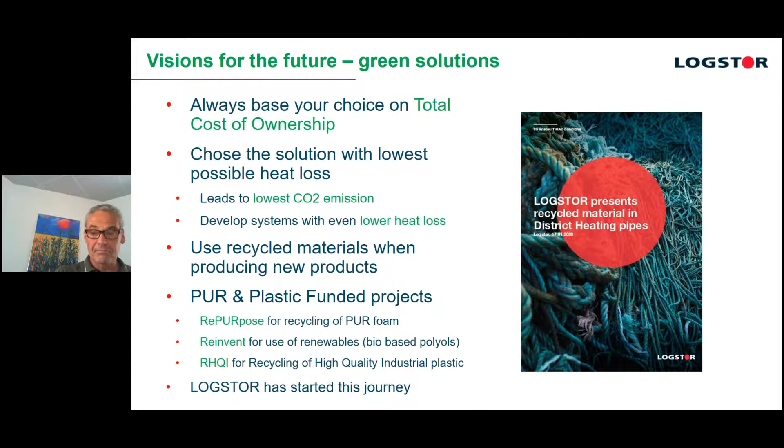That was it. Thank you.